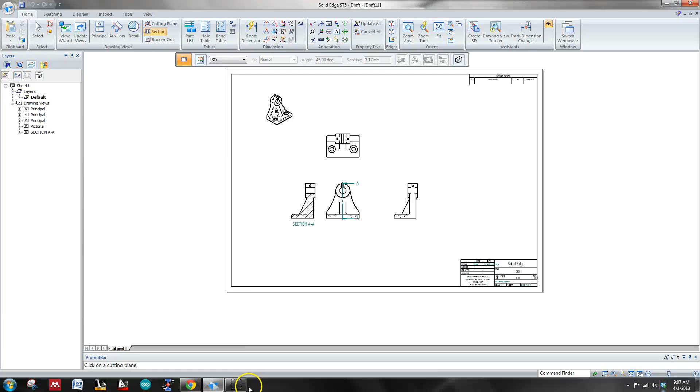Alright, so now I'll show you how to do an assembly real fast. Let's come up here to the Applications button and do ISO assembly. And then we want to go to our parts library here.

And then you want to navigate to wherever you put your parts. In this case, I just have them on the desktop.

And this is the most important thing about creating an assembly. Number one, the parts that an assembly is created up of are individual parts. I saw a couple of instances where people actually made multiple parts within one part file. What's really important is every single individual part is literally a separate file. So for instance, the nail you use to model something, or the nut and the bolt, all that kind of stuff, these are all individual little tiny part files that you will need to pull in.

Okay, with that aside, this is the most important thing that I'm about to say: the first part that you pull in is going to be considered the ground. This is the one part you can't move around or anything.

So in this case, we want to start off with our base plate. Here's my base plate, and I'm just going to go ahead and drop that in. So now the assembly knows exactly what's ground, and this is ground.

So if you've messed this up and flipped it over, and instead of drawing on the y x-axis you did something funky with it, that's going to kind of mess up your assembly. It's still going to be okay, but it's not with convention.

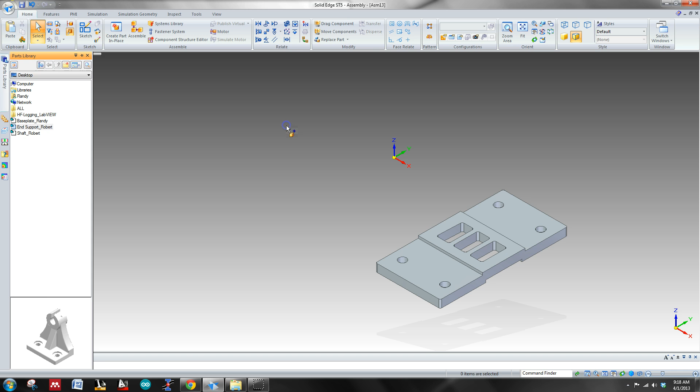Okay, so now we'll go ahead and pull in the next part, the end support, and you'll notice that it's green right here. So let's come over here, and you first want to highlight the part that you want to place, and go ahead and insert this thing here. And so that's just simply aligning the holes.

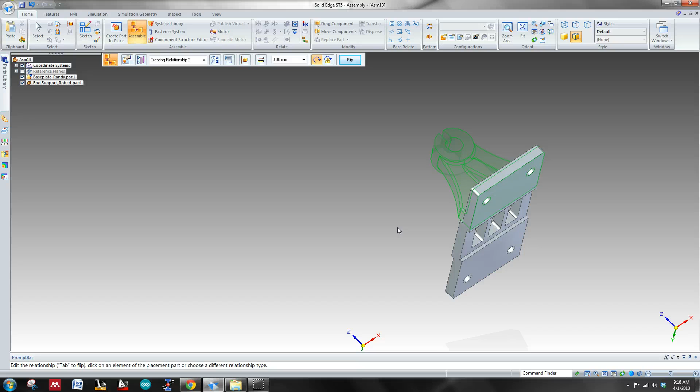This is some of the most frustrating thing really, because it's really difficult to put in the parts. So you really want to take your time and make sure you're highlighting over the right plane.

So this is the bottom of the end support here. I know it's kind of hard to see, and I want this to be placed up on top of this right here. So I'll just highlight it, click it.

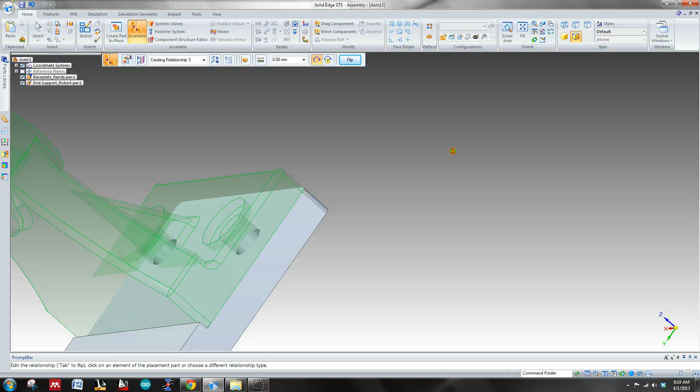And then now when I come over here, highlight this part, and just take your time, highlight that. Now when it goes gray like this, it means it's fully constrained.

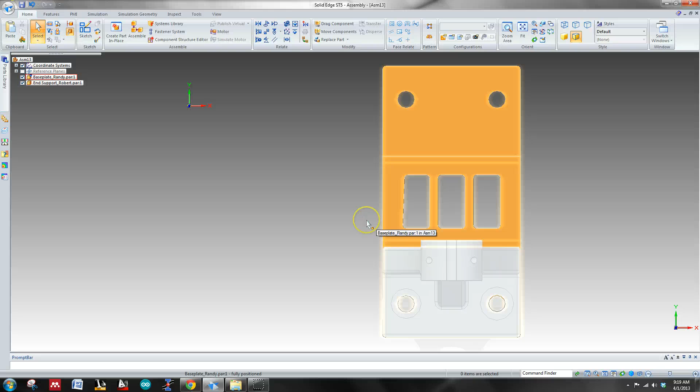So that's a good thing, or at least... so what I did is just Control T to get us to the top to see if there was anything kind of funky with it.

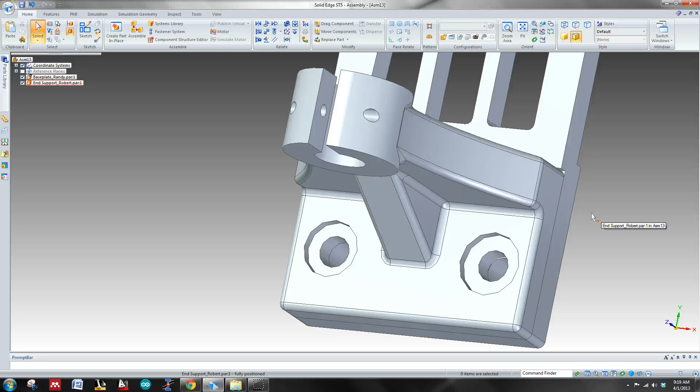And what I noticed right off the bat is I misplaced this hole right here. But that's okay, we can fix that, no problem. Let me go ahead and insert the other parts just for repetition, and I'll go back and show you how to fix that kind of stuff.

So now we pull in the other end support, and this time I'm going to put this right here. I'm going to mate the faces first.

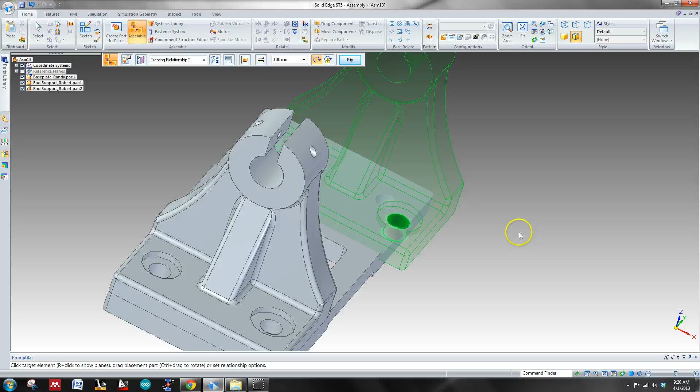It's probably a good idea to start off with, if you have holes or whatever, to start off with that. But it's okay, just for fun we'll do this kind of thing. So let me go ahead and get this.

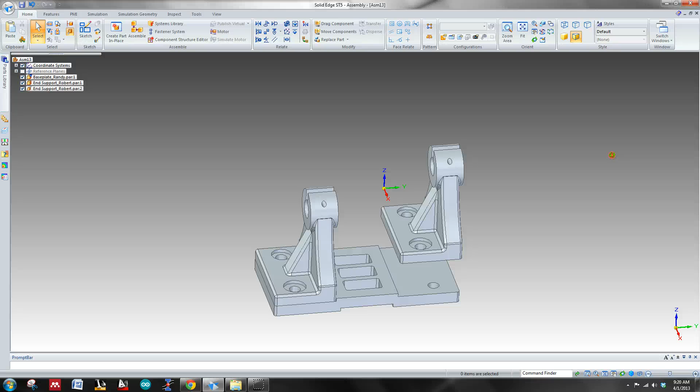Alright, so what happened was, so now we wound up with a situation where I did something kind of stupid here, and now I need to flip it, obviously. So what we can do is come over this part, and this is going to happen all the time. I'm going to go ahead and delete these relationships, really everything.

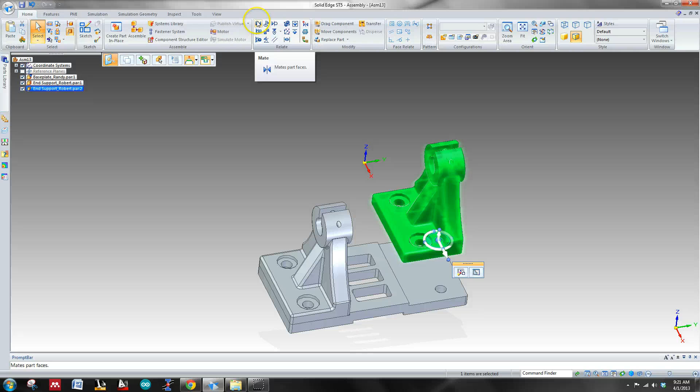Okay, and now we'll come up to, there's two things, axial align and then mating. These are like the two things I always use. I actually don't think I've ever used any of these other things. I've always just used axial align and then mate, or planar align.

So what I'll go ahead and do is use mate to mate these surfaces right here, so I can get this thing flipped. Alright, so that wound up pretty interesting there. So go ahead and this.

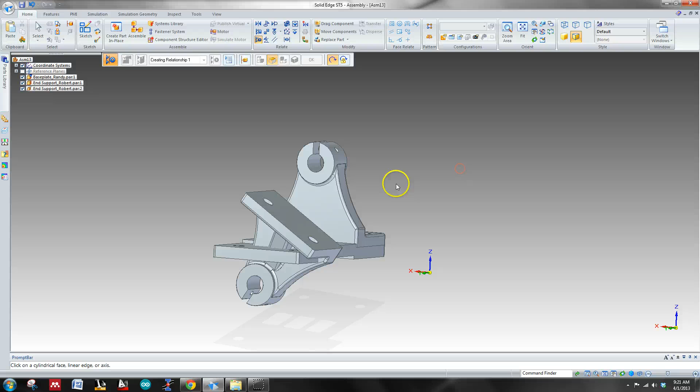So the problem with mating is occasionally it'll lock the rotation. So this happens constantly.

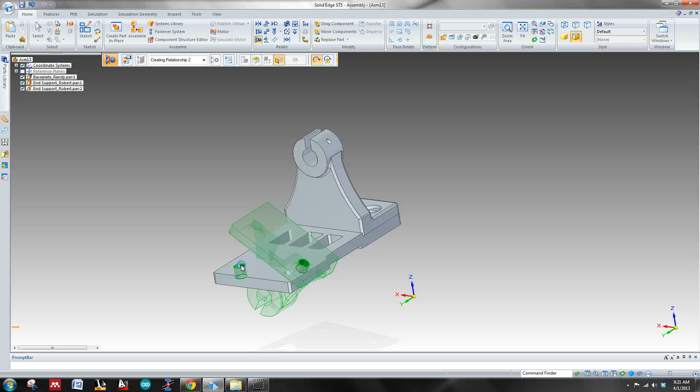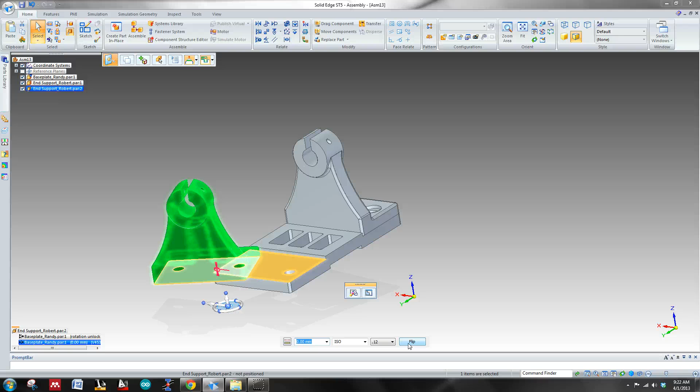Okay, now let's see if we can take this and go ahead and hit flip. So what I did there was, this is something you're going to always see - did you see how it wasn't rotating in the right position? So I went ahead and selected flip.

So I'll go ahead and take this, use planar align, and then now we need to go ahead and suppress relationships. Just by me doing this right here, you're going to see a lot of different techniques I'm going to use. So I go back and delete the relationship, and yeah, this is really super common.

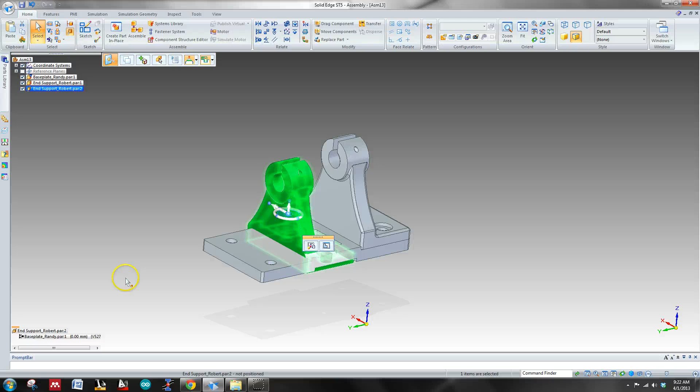Okay, so it's not in the right area here. So I'm going to take this, highlight over there. It needs to be flipped, right? So we just come over here and say flip side.

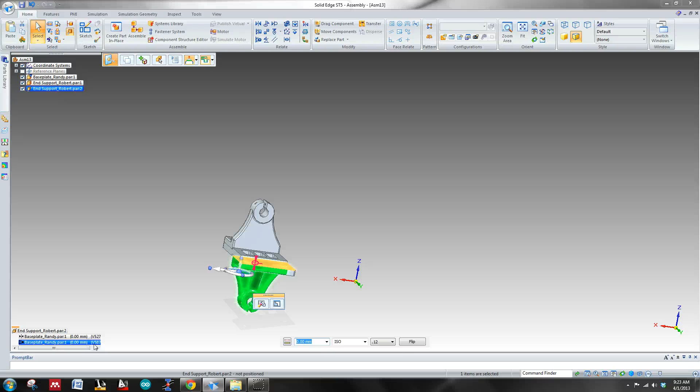Okay, very good. So now we'll come over here, planar align, right here, right there, and again, this thing needs to be flipped. Very good.

So escape out of all that. We might get an error thing right here because mate usually doesn't allow it. Okay, never mind, worked out.

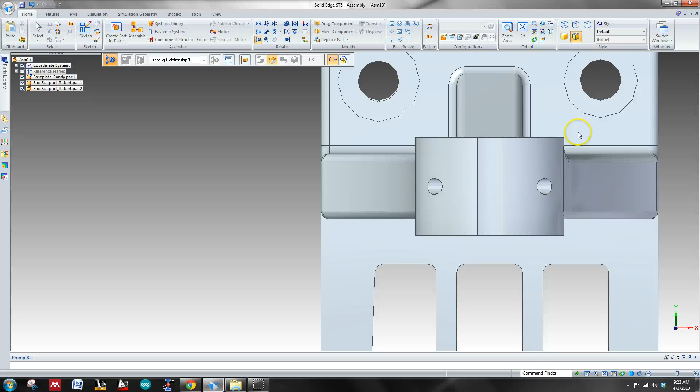So I used axial align to line everything up, and now it's the same situation where this whole thing isn't lined up at all. So that's going to be the main thing, where things are coming in differently, and now you need to find out ways to correct them.

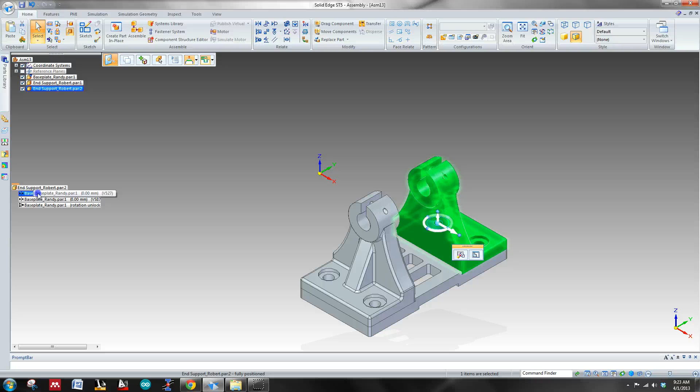And the easiest way to correct them is to highlight the actual part, and then come over here and click whatever relation - this is your actual relationship stuff right here, so it's how it's being related to other parts. I can expand this up if I want to, and come over here and flip the different things. Flip it like this. This is a technique I use constantly.

The other technique is just deleting relationships and then pulling them in again. And if you need to, you can just delete the part entirely and then try again when it's green or whatever. So yeah, let's go ahead and pull in another part here.

Oh, I don't have my bushing here. That's okay. So this is pretty much it.

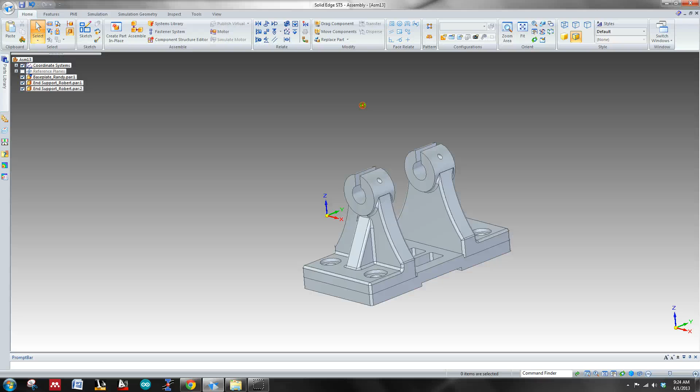But let's go ahead and see - what if we wanted to offset this part, for instance? Okay, this is something you're gonna actually need to do. If you click on the actual part right here, just highlight over it, click it, and you see the different relationships. So if you highlight it, you can actually see where it's being related to.

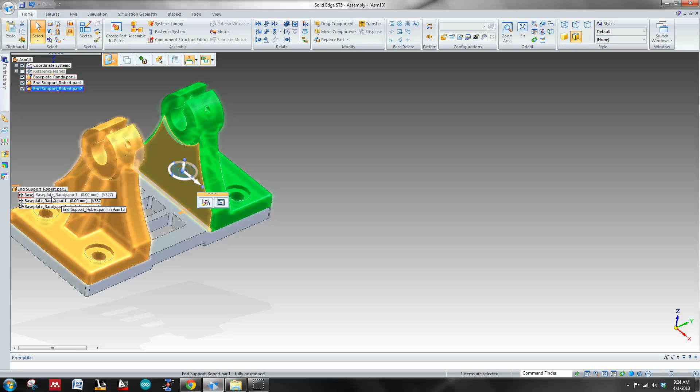So you can see this one right here is being related to the top of the base plate, and then this one right here is that little ledge. So say if I want to set this thing a little bit further away, I can come down and set an offset, some sort of an offset value. So I can go ahead and click 2 millimeters, and then it should offset it.

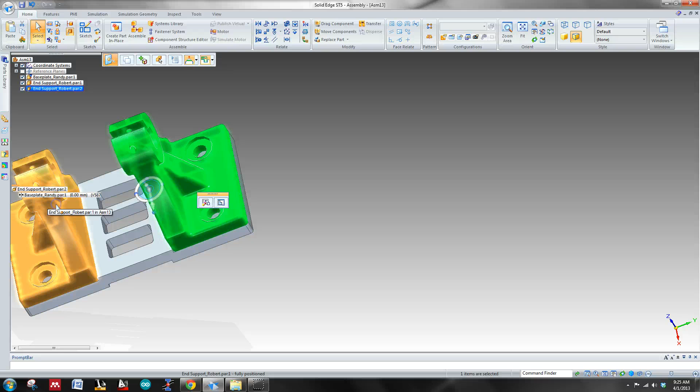But oh no, I have it related to this other thing right here. I'll spin it around - it's being related to the little red right here, shows conflicts or whatever. So what I'll go ahead and do is just delete these relationships for right now. Delete. So now it's not locked into, it's not glued between here and here, and it's also not glued right here in that little cylinder.

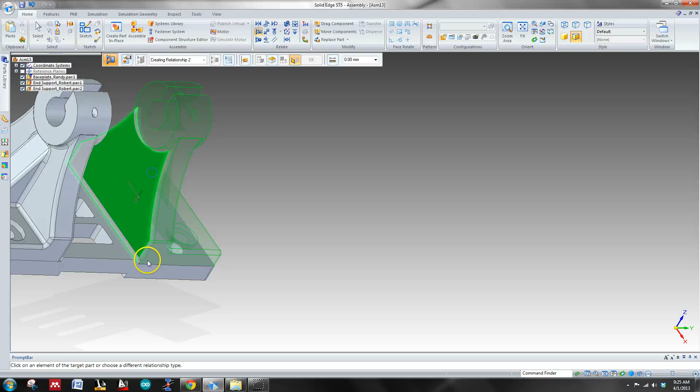So now what I can do is just reassociate those two planes. Sorry - go ahead and reassociate the two planes.

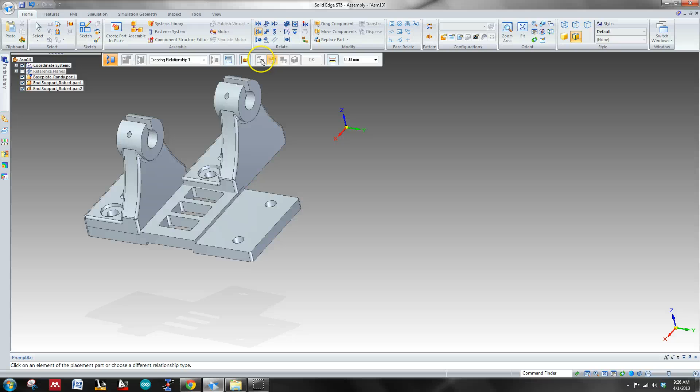And then of course we want to flip that, so right here, flip it. Great. And then let's go ahead and specify some sort of offset. Let's go 2. Okay, so now you can see here from the right side that we can offset it as much as we want.

So this is something you're going to need to use when you set the wheel on top of the actual shaft. You'll need to offset that from, I believe, the bushing or some element. So again, you can see how this offset is changing. Let's go ahead and put it back to 0.

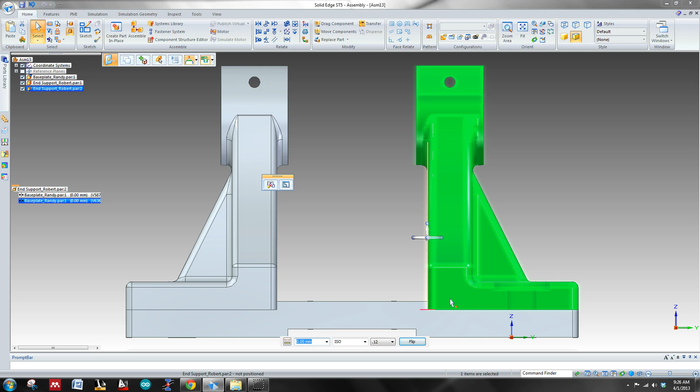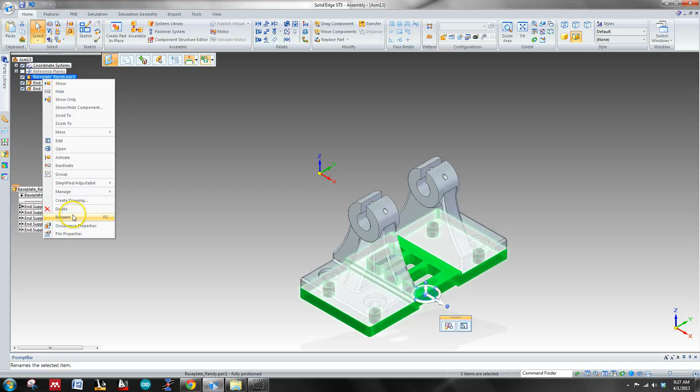And then now what I'm going to do is show you how to, if you make a mistake like I did, right? These holes don't line up. So what you can do really quickly, and this is a little bit advanced but not difficult, is select this part. What we can do is come over here and edit it if we want. So let's go ahead and come over here down to edit, and now we can just simply edit this part and see what's going on.

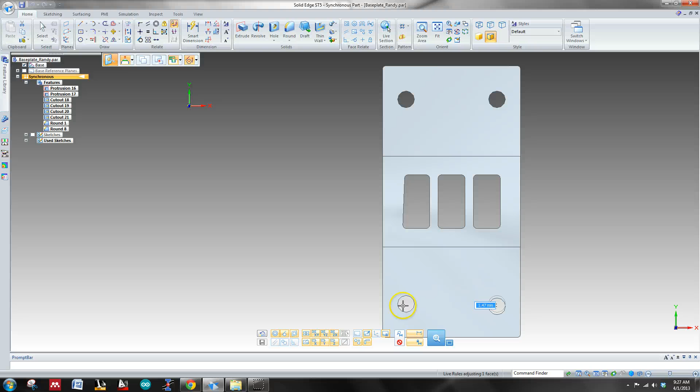Just this thing's moving. Come over here so I can key off of everything, and double check that this thing is in fact okay. Alright, cool, it appears to be fixed.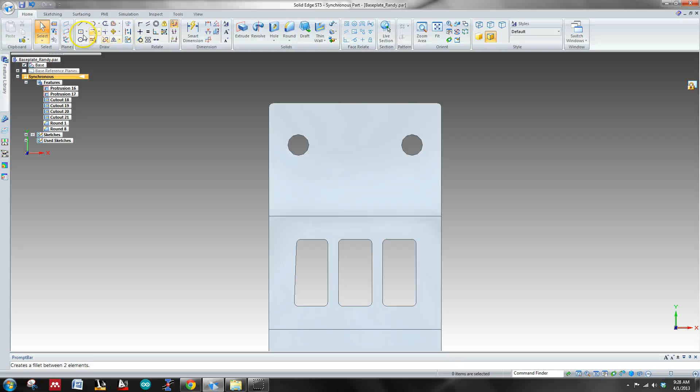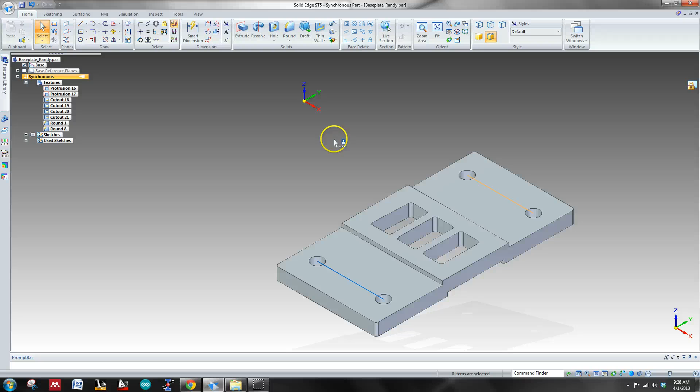So they appear like they were in line. I'm not sure what the deal is, but let's go ahead and hover over top of this, just make sure that these are aligned with each other. Okay, so we'll go ahead and save this, and it'll go ahead and update that assembly right now so we can see what the issue is, whether or not that fixed it.

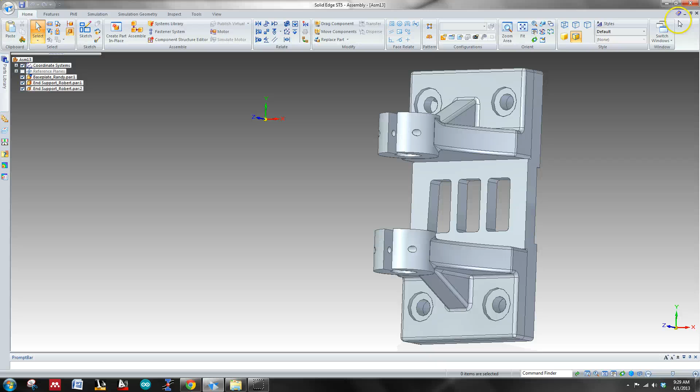Okay, cool. So it was updating, but for some reason it's still not fixed.

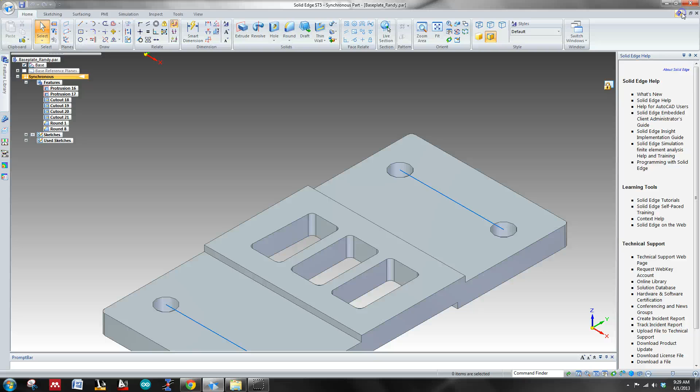Save it. Oops, don't want that. Alright, so I'm pretty confident that these are in line right here with each other.

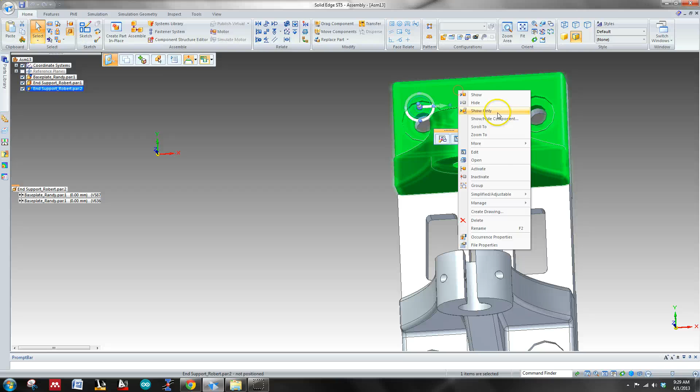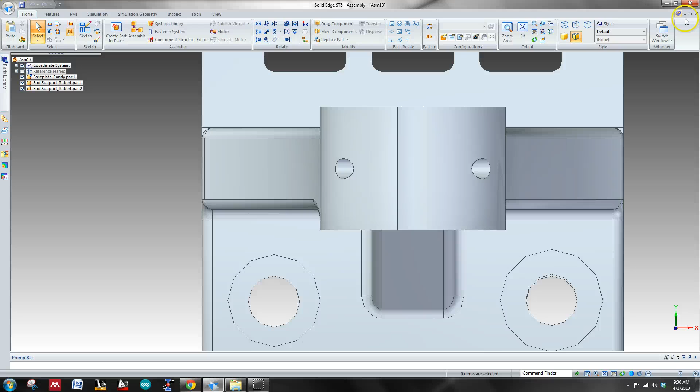So it must be these holes. Let's come over here and we'll edit this. I must have made a mistake on this side. This kind of takes some remembering, they usually will keep the actual drawing. So it looks like this hole right here on the right side is up a little bit too far. So I'll go ahead and edit that right now.

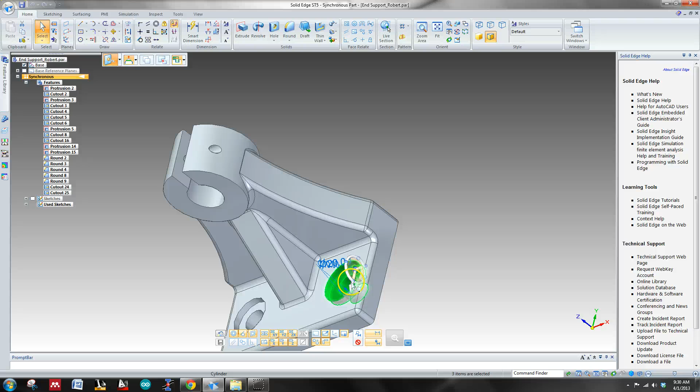Going back, top side, and I'm just going to select the actual feature. Okay, so what happened there was I did not put the steering wheel in, it was referencing some arbitrary point.

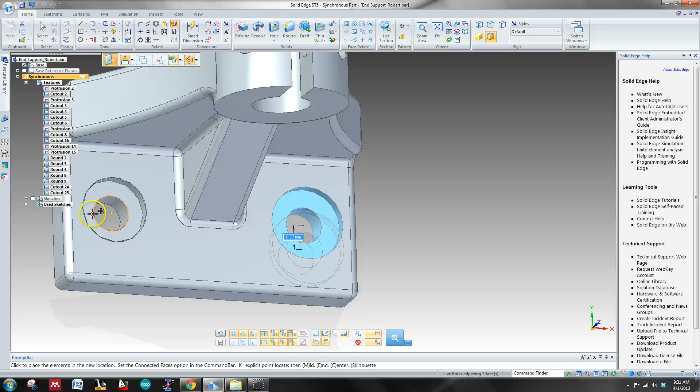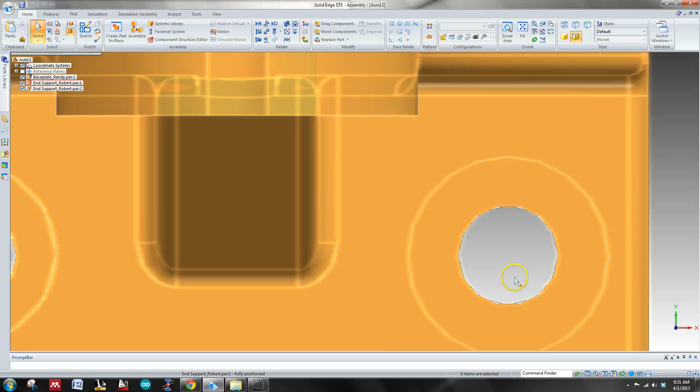Okay, that should have done it right there. Let's go ahead and see what happened. Back up, open to. Okay, and that went ahead and fixed it. So we now can see that just by going through and seeing where the problem is, I was able to fix that misaligned hole that we saw before.

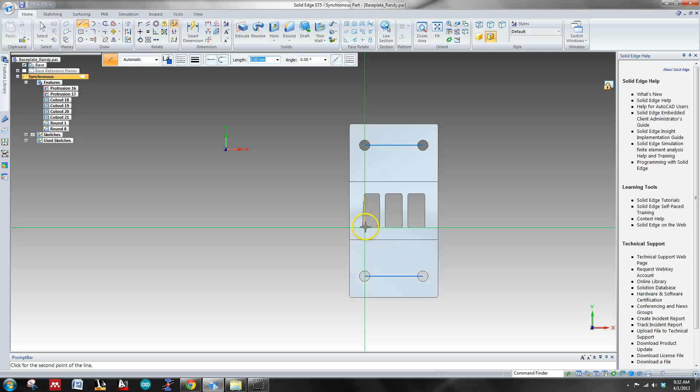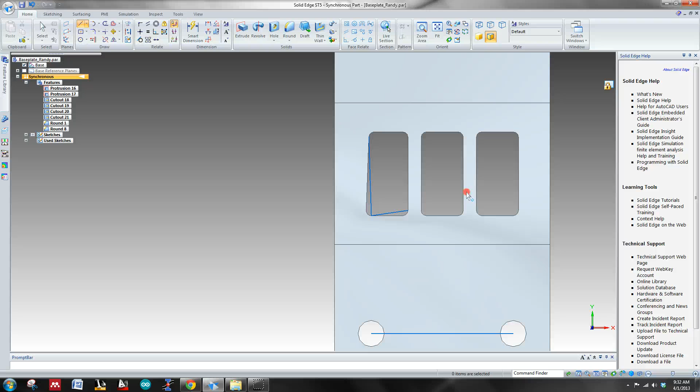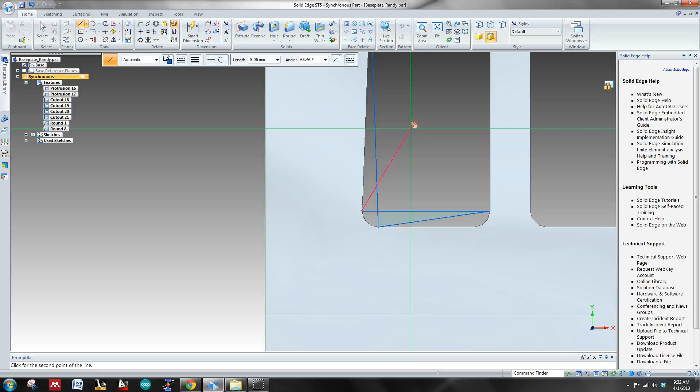Oh, and then this thing, of course, is incorrect as well. So the easier way to do this is, just because I know that this one's completely wrong, I'm gonna figure out where this is. 22, this thing.

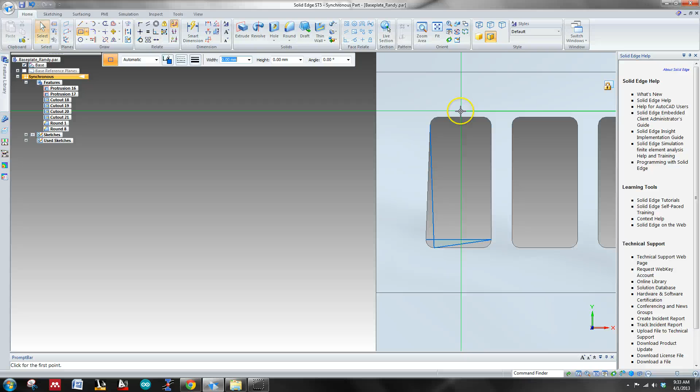They're all associated together, you see how I can just see that they're all about the same. So that's okay, we'll go ahead and just fix it right now. So what I'm doing is quickly using these grid lines to snap on and see where my center is. So we want width to be 16 by 32 by 0. Okay, now we'll go ahead and extrude what we need to extrude.

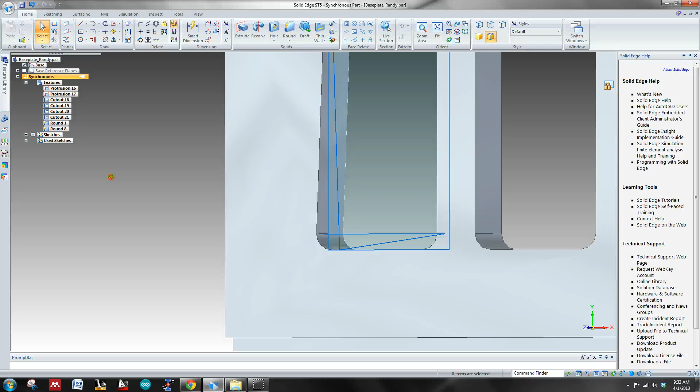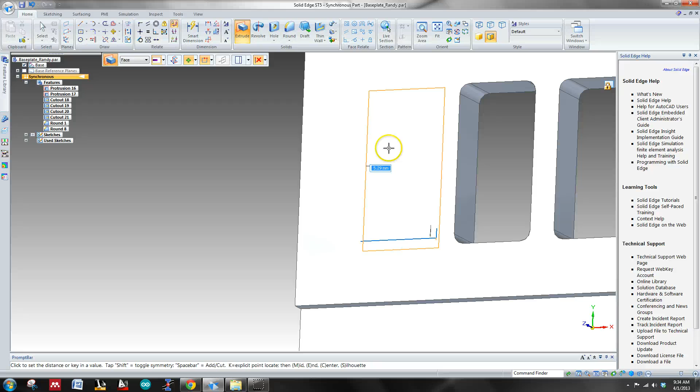So sorry, the first order of business is to close this up. And then we'll go ahead and do rounds here.

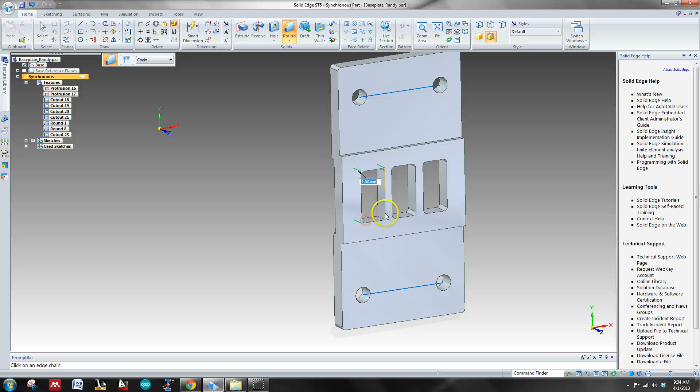Alright, so that's not exactly right, is it? There's supposed to be 5 between the two of them.

Ah, Jesus. Oh no, shoot, I'm sorry.

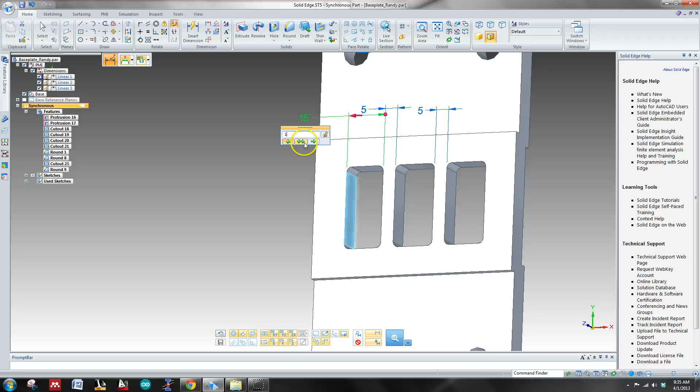16. Okay, that is one way to do that. And just for...

I'm just making sure that everything is aligned here. Perfect.

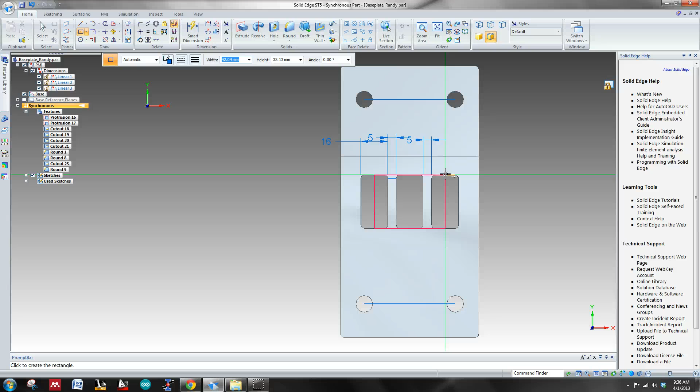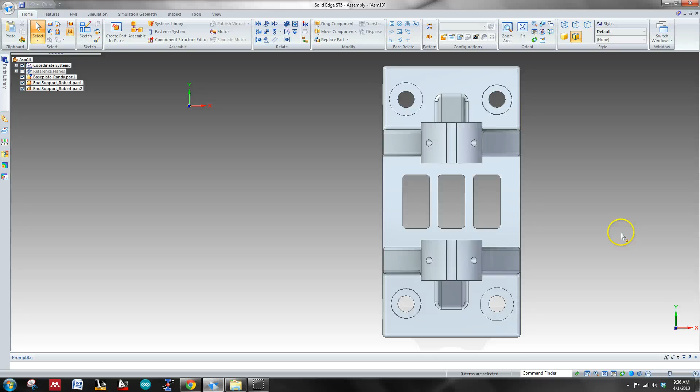Okay, looks to be about good. Go ahead and save this. Open up my assembly. And as you can see, it went ahead and updated all that stuff for us. So we are good to go.